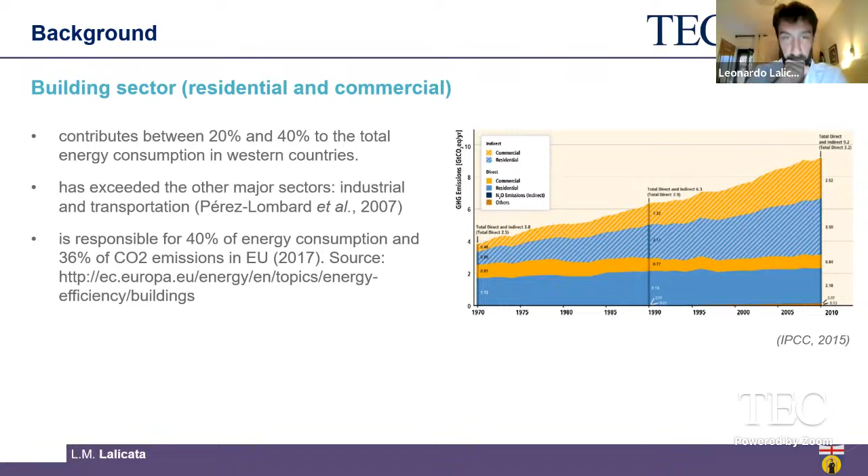With building sector, both residential and commercial, we include all, which means from the product, so the sourcing of the materials and the construction, transportation, operational use, and waste of the material and buildings in general.

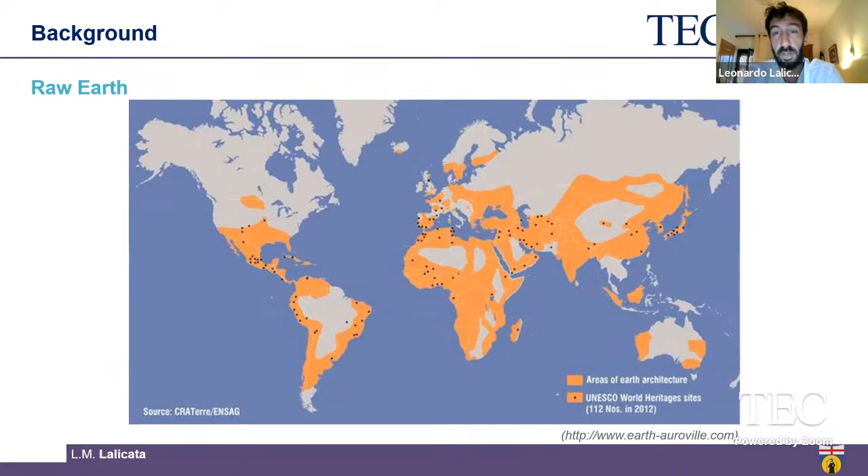Another important thing to mention is that a large number of UNESCO World Heritage Sites are made partially or in total of raw earth, earthen materials. So there is interest not only from the construction point of view, but also from the preservation of historical monuments and our heritage, to better understand how this structure works.

I've collected some nice pictures of UNESCO World Heritage Sites, such as this city in Shibam, Yemen, which is more than 2,000 years old. This is called the Manhattan of the desert, because these high-story buildings, 8 to 9 stories each, look like skyscraper profiles in a way.

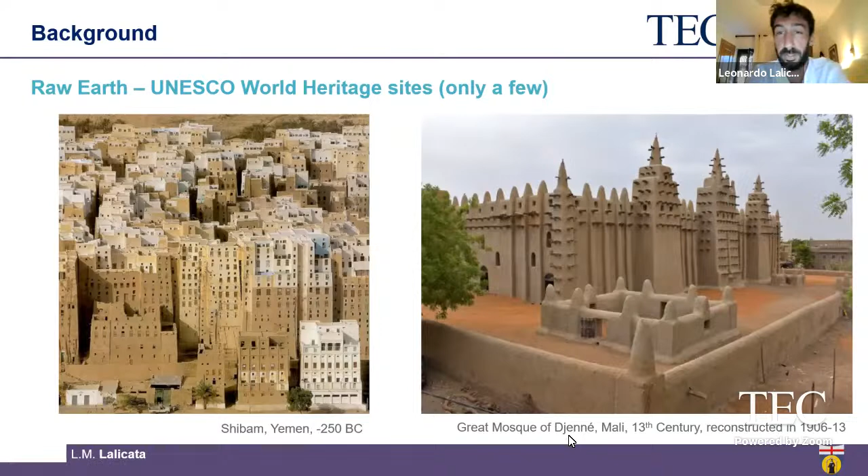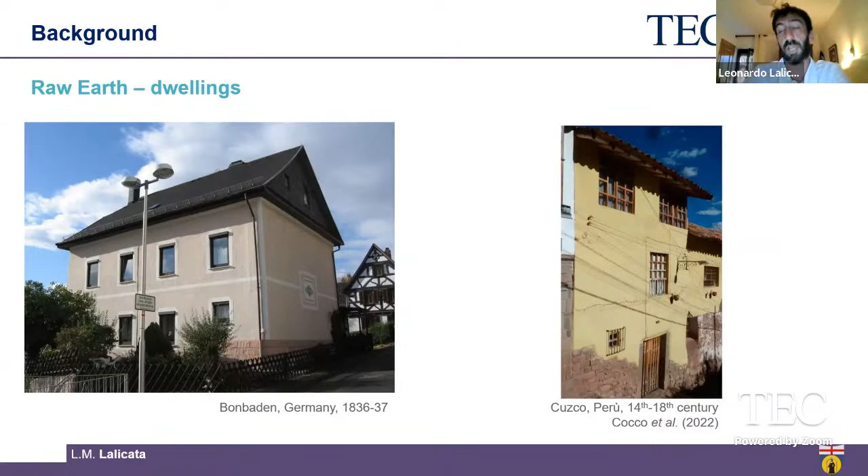There are also combinations of dwellings and UNESCO World Heritage Sites, such as the city center of Cusco in Peru, where the whole center is built on adobe walls. Buildings are made of adobe walls founded on stone foundations, and this belongs both to the Inca Empire and to the Spanish period. So they both used the same technology because it worked really well in that area.

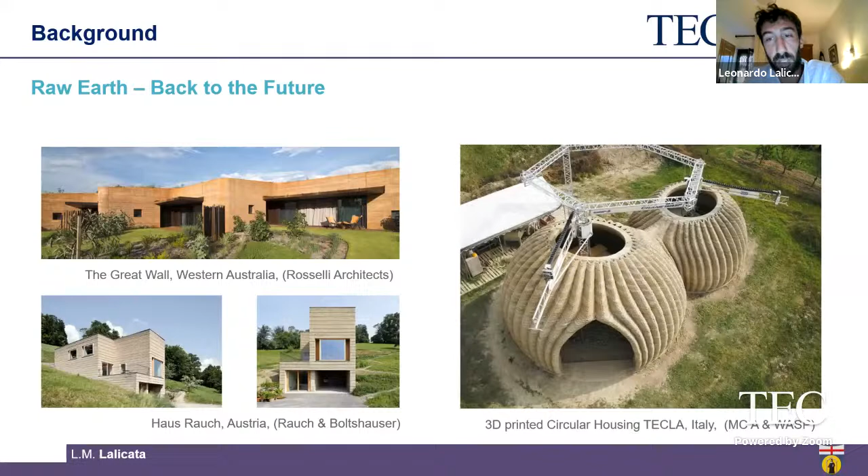This has been built in Italy, and it's notable that this 3D printed house is printed in mud bricks. So it is earth, which is 3D printed and sprayed.

So what is raw earth? Raw earth is a construction material which mixes soils and water, and is then put in place trying to undergo the least possible transformation.

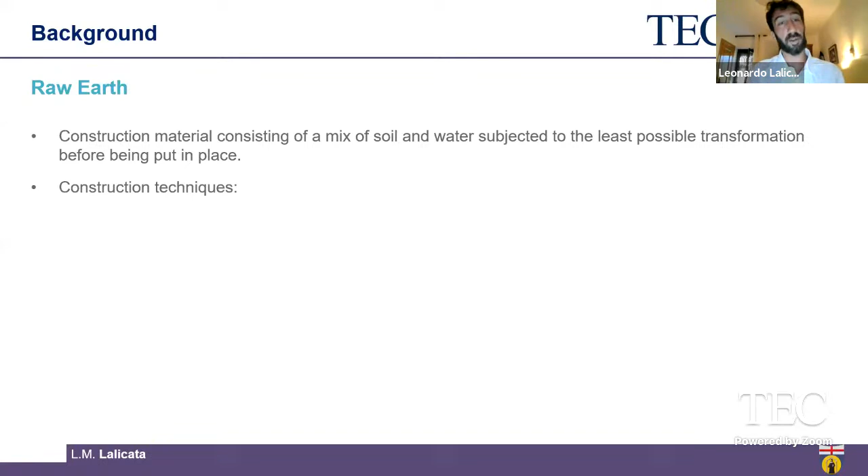During the centuries, a number of construction techniques have developed, which I've tried to summarize here. First of all, the adobe, in which you prepare your brick in formwork, and the soil is mixed with a high water content, so the soil is in a plastic state. Once the brick is dried, you can assemble your wall.

Similarly, we have the cob, in which we mix water, soil, and straw to build freestanding walls. This is particularly used in Northern Africa, for instance. Once the material dries, you can build up the second part of the building.

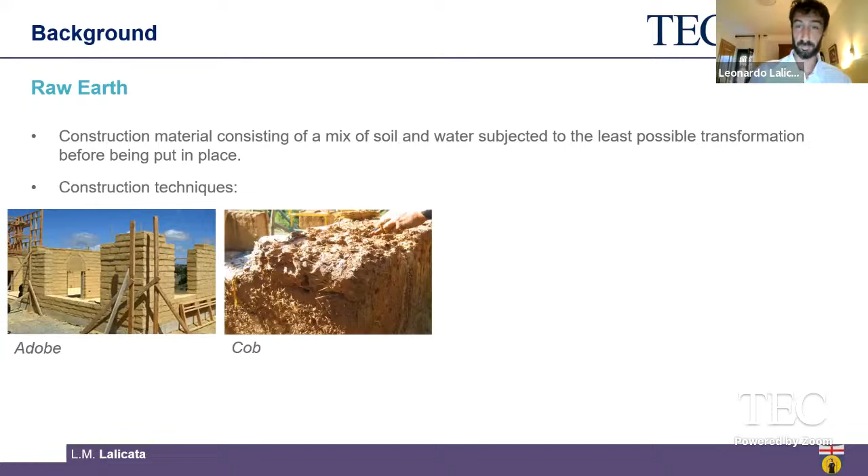We also have compressed earth bricks, in which the water content is much lower than in the other two cases, and you increase the compaction energy. You can use these bricks like Lego, compacting them into different shapes so they better fit one to each other and build a stronger wall or structure in general.

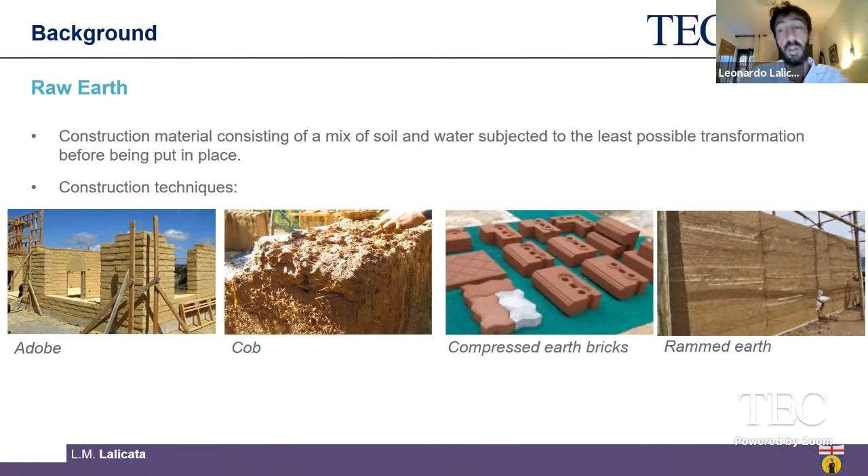And finally, there is rammed earth, a technique to build freestanding walls by compacting layers of soil at the optimum water content in formworks. When the material dries, you can remove the formworks and proceed with your construction.

At the beginning, I was talking about the building sector. By building sector, we must intend the general process: not just our buildings, but also the materials we need to construct them, plus construction, transportation, use, life cycle use, and finally end of life. It can be shown that rammed earth can help reduce carbon emissions at all stages of the life cycle.

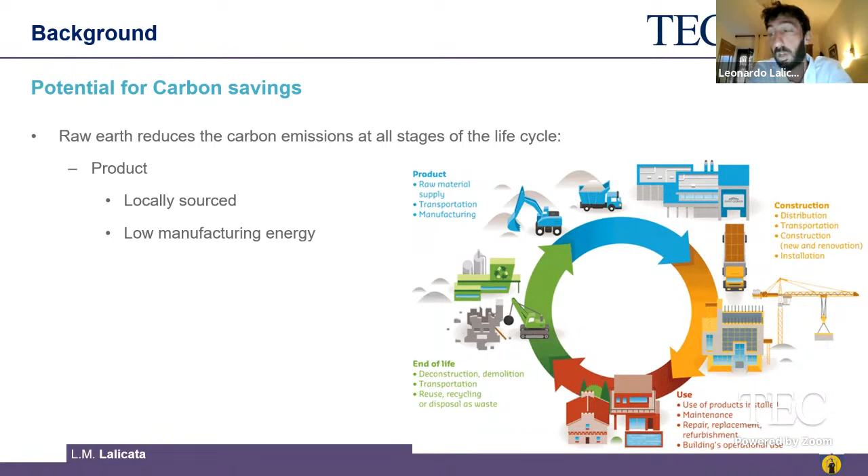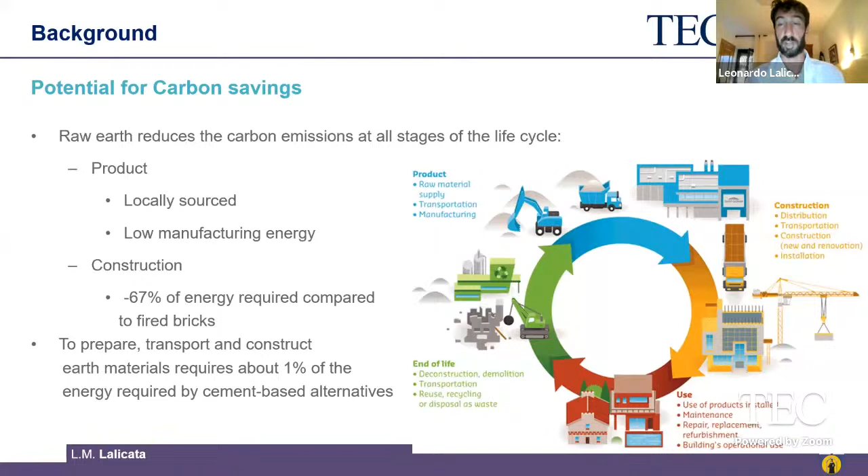In terms of product, by using earth, which can usually be locally sourced, you also require very low manufacturing energy. For example, in terms of construction, you need 67% less energy to build the same dimension brick compared to a fired brick one, so there is a significant savings in terms of energy required. And if you compare that to the energy required to build the same structure using cement-based alternatives, you need approximately 1% of the energy compared to the cement alternative, which again is a massive decrease and massive importance for carbon savings.

But first, let's go a little bit into detail on the mechanical aspects of raw earth. As I said, raw earth is made mainly of soil. The first thing to notice is that we cannot use all soils, because not all soils are suitable to be used as construction materials. There are standards and rules that tell us the particle size distribution our soil should have in order to be used.

As a general rule, you should have between 5 and 35% clay, 10 to 25% silt, and so on, approximately 40% sand, and then what is left can be gravel.

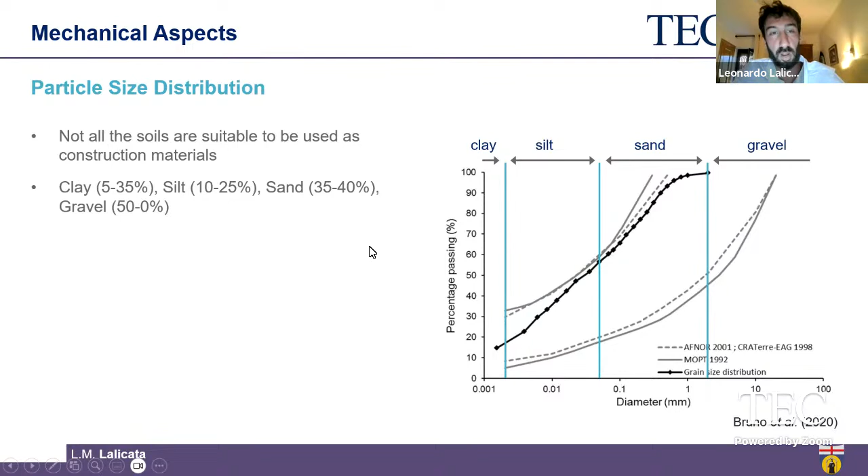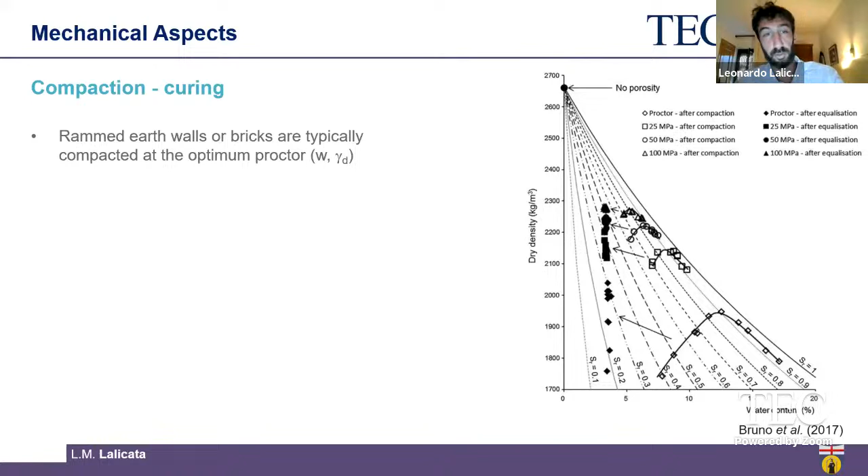After that, you need to prepare your bricks or walls, and typically you compact your samples to the optimum water content, which is the amount of water that gives you the higher density at the same compaction energy. But once you've prepared your brick or wall, you need to wait for it to cure, meaning the drying process in which the brick dries. In this case you can have some shrinking, and this shrinking can induce problems in terms of quality control, repeatability of your results, and your structure. This is very important if you want to apply that systematically.

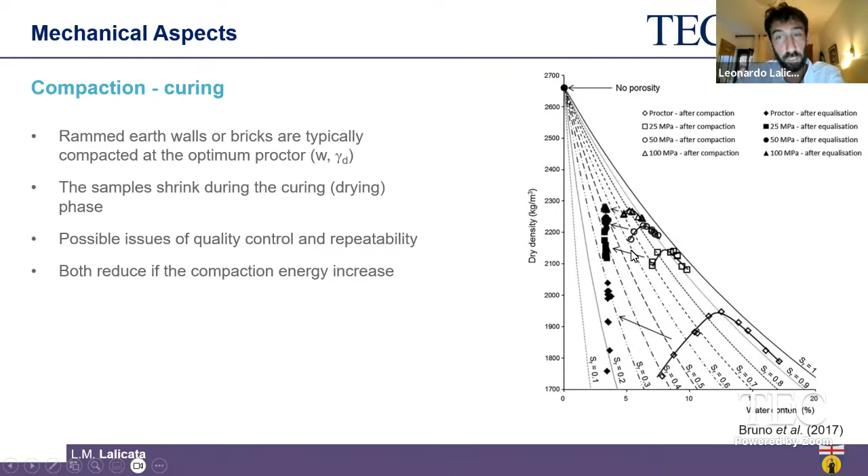One option to reduce that: you'll see your points move from this curve, and they will go to the left, because the sample will lose weight and water content, approximately 3–4%. You see there is a lot of variation in this data. One option is to increase the compaction energy. For instance, these points here show increasing compaction energy, and then the drying, the curing process, induces a much lower change in density and also in shrinking, obviously.

But another beneficial effect of increasing the density of our samples, of our bricks, is that we exponentially increase the compressive strength. As you can see, normal Proctor-compacted earthen materials have compressive strength of about 0.5 to 2.5 megapascals. But if you increase the compaction energy, so increase the dry density, you get up to 10 megapascals of compressive strength, which is more than suitable for construction purposes.

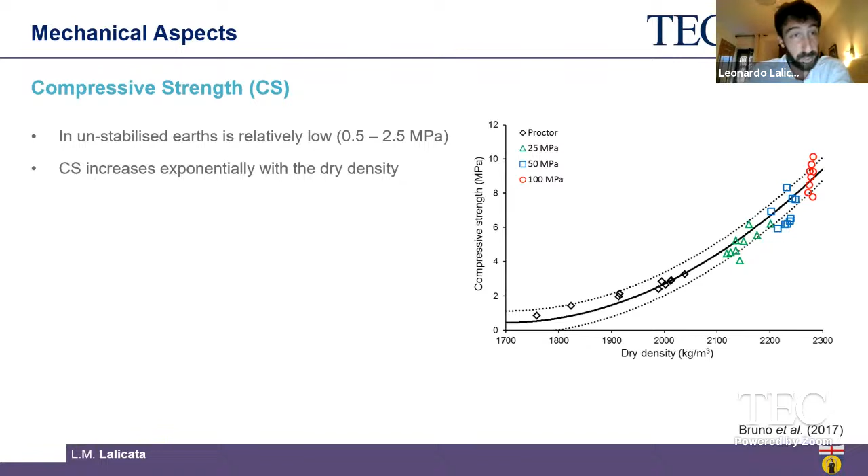An alternative to increasing the energy, because maybe you don't have the resources to do that, is to use stabilizers. There are standard stabilizers such as lime or cement, but also recently they are developing novel biopolymer stabilizers. Usually you get an increase in compressive strength with stabilizers, which is less marked for the biopolymers, but in general you get an increase in compressive strength.

Also regarding the effect of recycling this material, because earth can virtually be reused a number of times, in this study by Bruno et al., after testing the samples they crushed them and built new samples to test the influence of eventual degradation of compressive strength over different cycles.

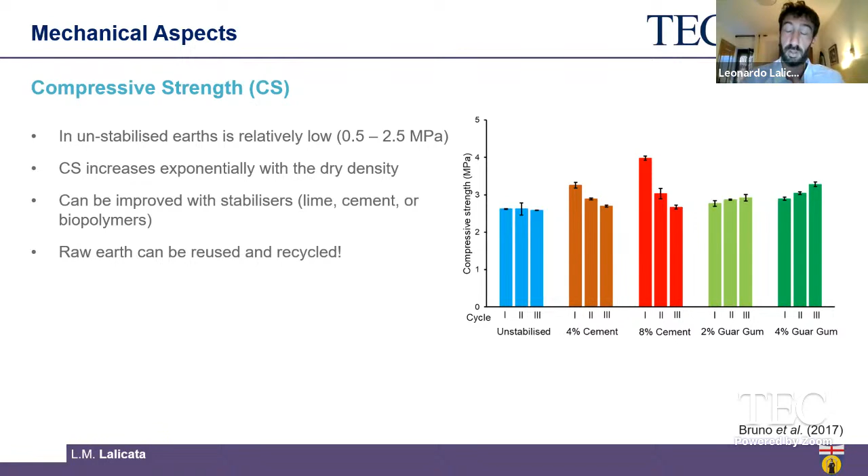What they found is that standard unstabilized earth did not reduce its strength with the number of cycles, while on the contrary, the earth stabilized with 4 or 8% cement showed a reduction in compressive strength, because you are basically breaking the bonding that the cement gives to the material. On the other hand, the biopolymers showed a slight increase in compressive strength, but this is because the curing process of the biopolymers is much slower, so something is still curing over time during these cycles. The important result overall is that you can use and recycle raw earth in both stabilized and unstabilized conditions.

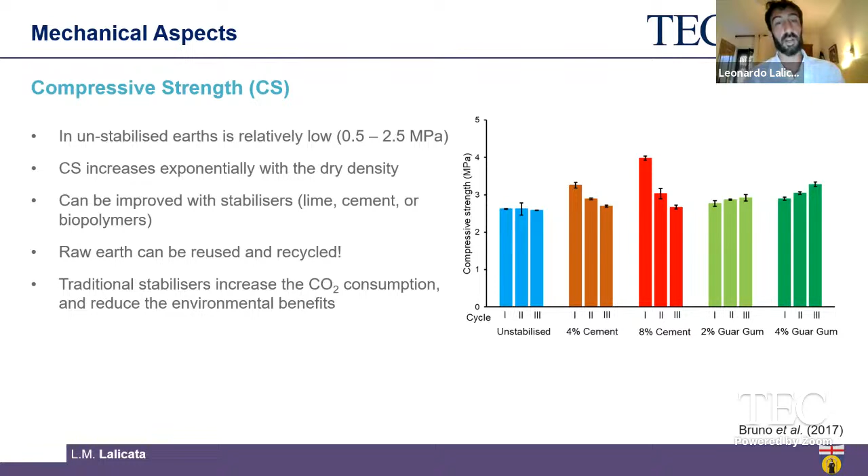The problem with the stabilizers is that they increase the carbon emission consumption, and possibly they reduce or even drop to zero the environmental benefits of using raw earth. So you need to find the equilibrium between the compressive strength and the use of stabilizers in this case.

So I hope I gave you an overview on how raw earth can tackle climate change in terms of product, construction, and also end of life, such as reuse, recycle, and disposal. What is missing in this picture is the indoor comfort, which is the operational use. What happens during the operational use of a raw earth building?

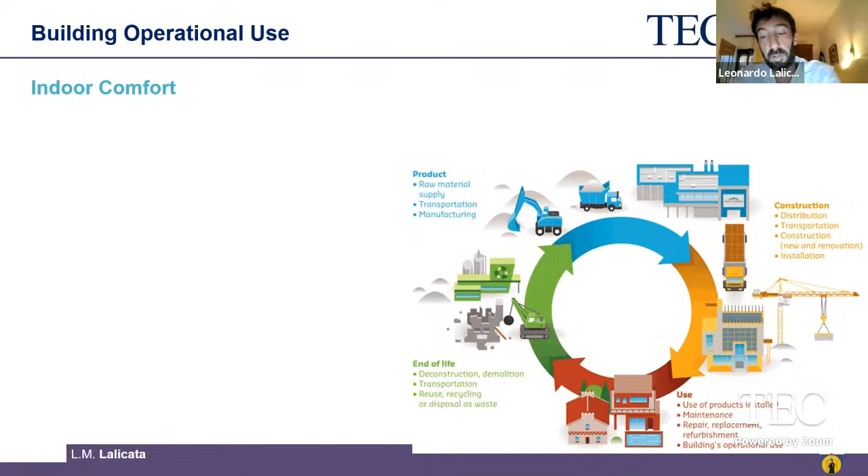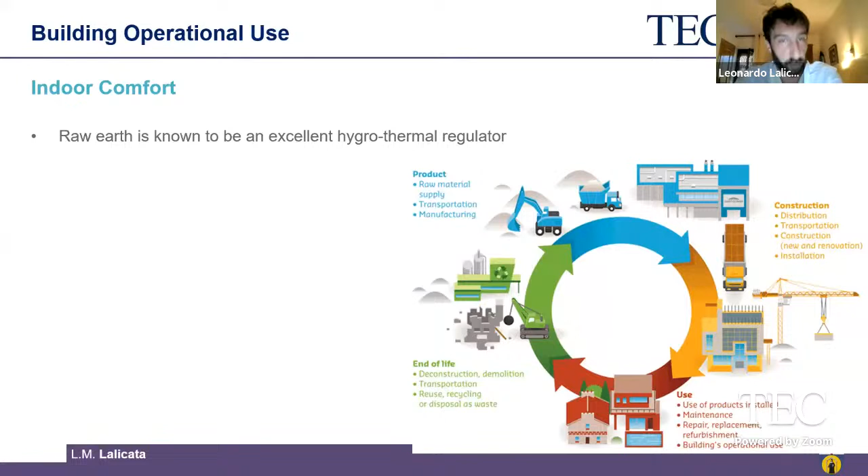Well, if you look at the literature, what you find is that raw earth is known to be an excellent hygrothermal regulator. With this hygroscopic regulator effect, the wall is capable of absorbing and releasing moisture depending on the current ambient humidity. This is possible because of the open network of nanopores present in the earth materials. As a consequence, there is also a thermal regulator effect, because the evaporation and condensation processes that occur during this absorption and release of moisture need energy. During evaporation, the soil tends to absorb heat from the atmosphere, which is then released during the condensation phases.

The problem is that you can find only qualitative assessment of the hygrothermal performance, for a very simple reason. First of all, laboratory experiments as well as field investigations are time-consuming, very expensive, and difficult to control, because it's actually a nightmare to control relative humidity, both in a climate chamber and on site. So for that reason, it's not really easy to find a proper assessment of the hygrothermal performance of earth materials.

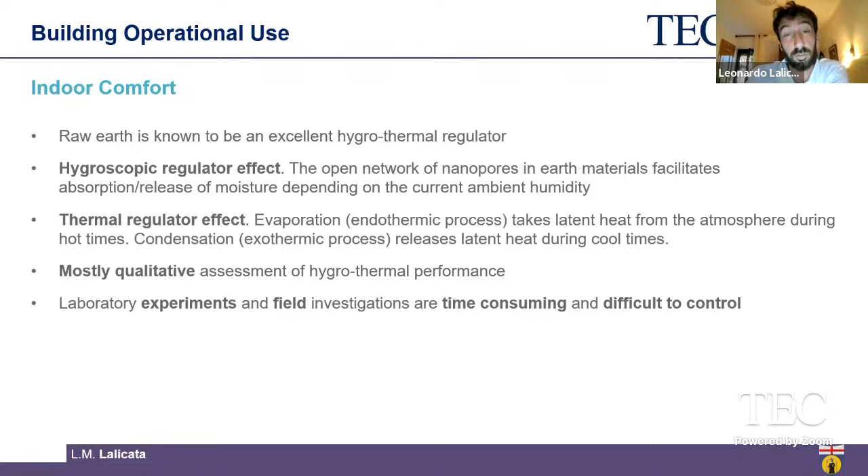One option to overcome this problem is to adopt numerical and constitutive modeling of the hygrothermal coupling. This is actually my topic, and now I'm going to show you a little bit of insight on what happens during this coupling.

First of all, with coupling, we are thinking of the complex interaction happening between the three phases in the wall: solid, liquid, and gas. Liquid and gas are water, so we have liquid water and water vapor, while the solid in our model is just a rigid structure which influences the results in terms of porosity and thermal properties of the grains. In these problems, we also need to account for the phase change between the liquid water and the water vapor that can go from one side to the other.

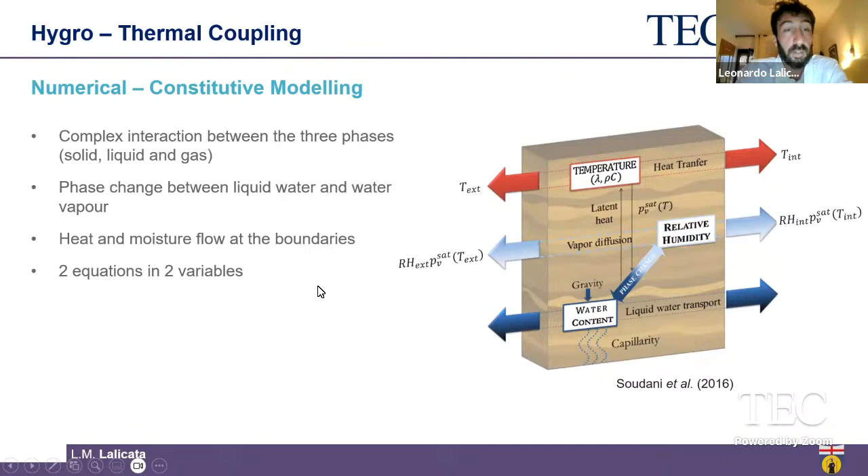We also need to account for the heat and moisture flows at the boundaries. In conclusion, we need to solve a system of two equations, one for temperature and one for water, in two variables. These two variables are generally the relative humidity for the water equation and the temperature for the energy balance.

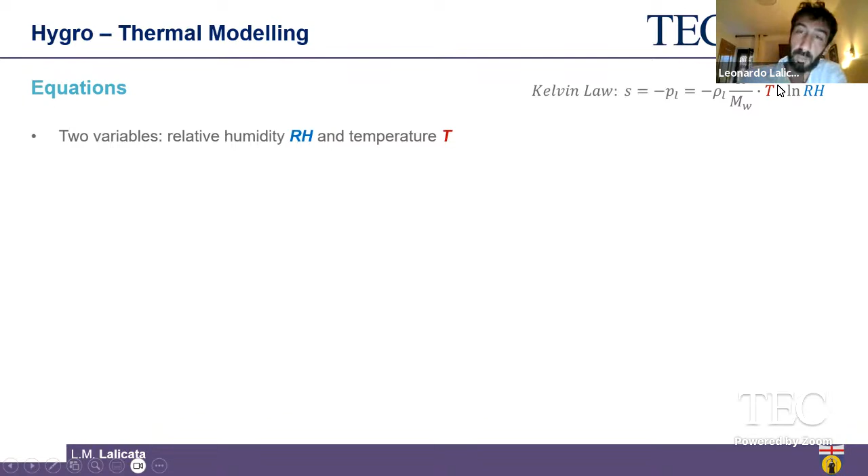To these two, we need to include another equation, the well-known Kelvin law, which links suction—a potential energy, but also the negative values of the pore pressures in the soil in our material—to temperature and relative humidity. With these two and the Kelvin law, we can write our water mass balance.

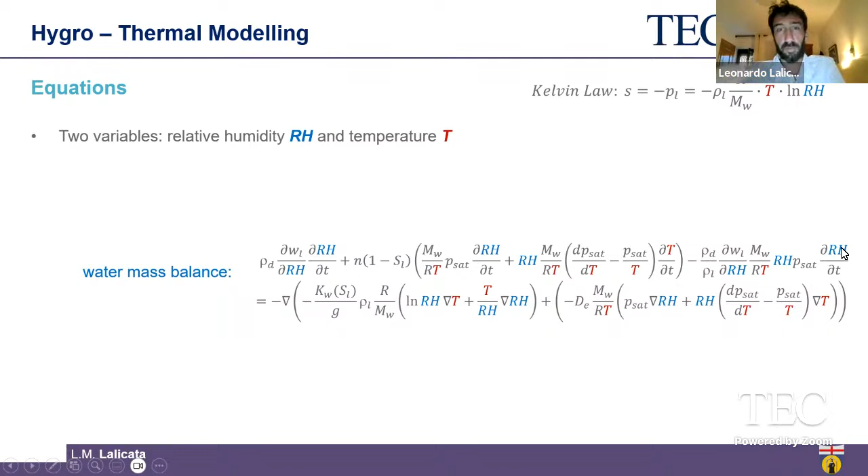That is this equation, made up of a number of terms. Basically, what it's saying is that we have a storage term for the liquid water plus another storage term for the water vapor mass, and this must be equal to the fluxes: the liquid water flow that follows the generalized Darcy law, and the water vapor flow that obeys Fick's law. So this is a diffusion process through the medium.

In terms of thermal balance, the equation has the same shape, but here the storage term is a function of the heat capacity of the materials, while the flow is given by conduction, described by Fourier's law. There is also another term, often neglected but very important in our case, which is the energy required in the phase change process, a function of the latent heat of evaporation of the water.

The first thing I tried to do when I first saw this equation was think, wow, this is very complicated. Let's try to find a way to understand what is important and what is not. This is the insight I'm going to give you now, based on the work of the last year and something, which has been published in some papers.

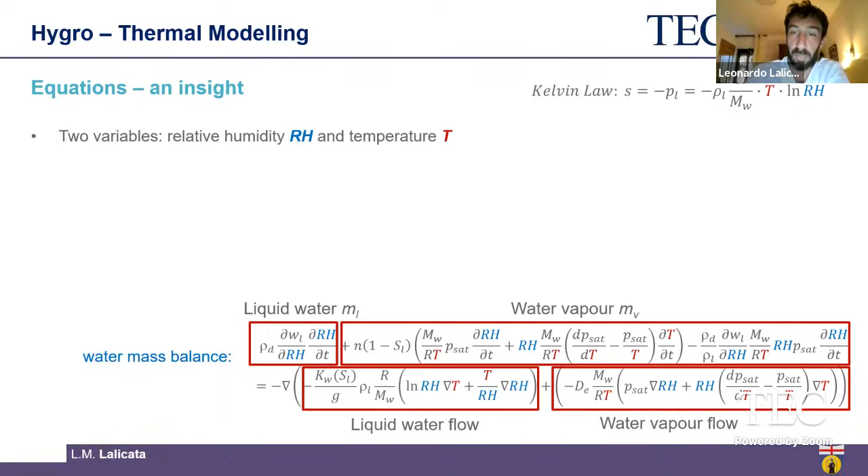First of all, I've been focusing on the water mass balance, and in particular on the importance of this term, which is the water vapor mass change compared to the change in liquid water mass. What we found is that in most applications, the change in water vapor mass is much smaller than the change in liquid water mass, meaning it's negligible. If that's true, we can cancel out this term, which really simplifies our life and our equation.

One very simple explanation for that, even though there are vapor fluxes in our soil, can be explained in terms of density. We all know the density of water is 1,000 kilograms per cubic meter, but the density of water vapor is approximately 1 kilogram per cubic meter. This means there are at least 3 orders of magnitude difference in weight between the liquid water and the vapor, which makes this assumption more than reasonable.

The other aspect I've focused on is this Kelvin law here. Suction depends on both temperature and relative humidity, but if we plot this equation, we find that suction really depends on relative humidity, changing by about 550 megapascal across the whole range. On the other side, from 0 to 100 degrees of temperature change, the changes in suction are really modest compared to those induced by relative humidity. In mathematical terms, the variation of suction due to temperature is much smaller and negligible compared to the changes due to relative humidity.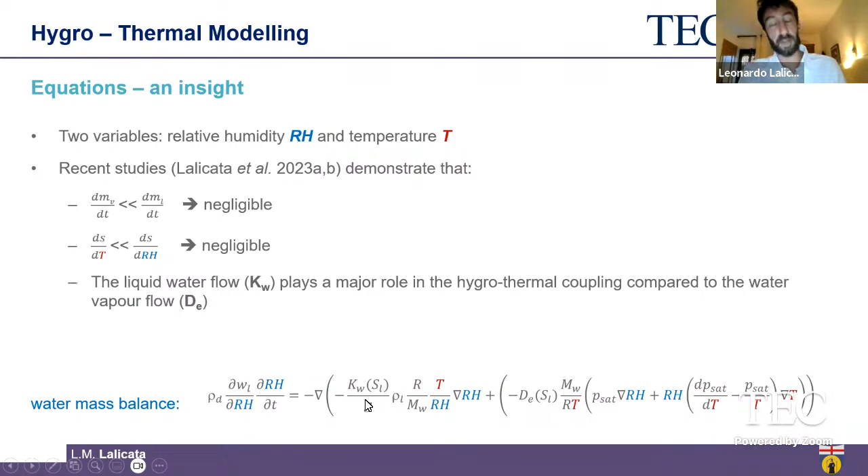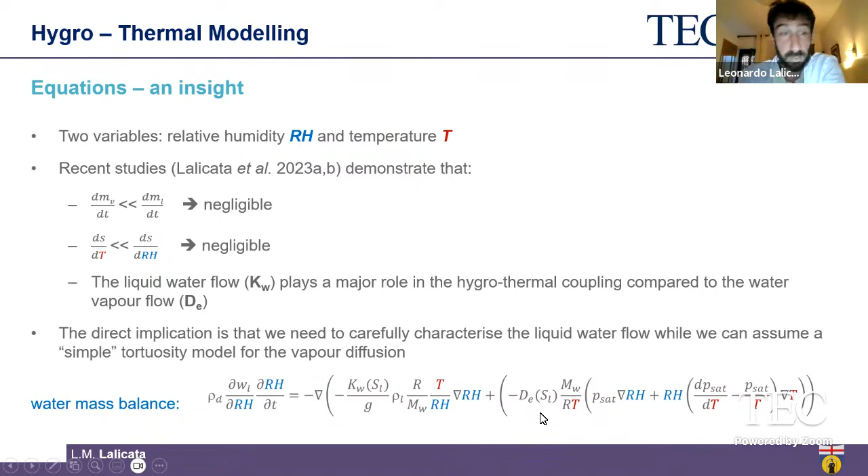The other result of our preliminary investigation is that the liquid water flow, described by this parameter Kw and depending on these parts of the equation, plays a major role in the hygrothermal coupling compared to the water vapor flow, which is the diffusivity tensor here. For us, this means we need to carefully characterize the liquid water flow, while we can assume, without any significant error, a simple tortuosity model for the vapor diffusion. By simple, I mean you can use a standard literature solution.

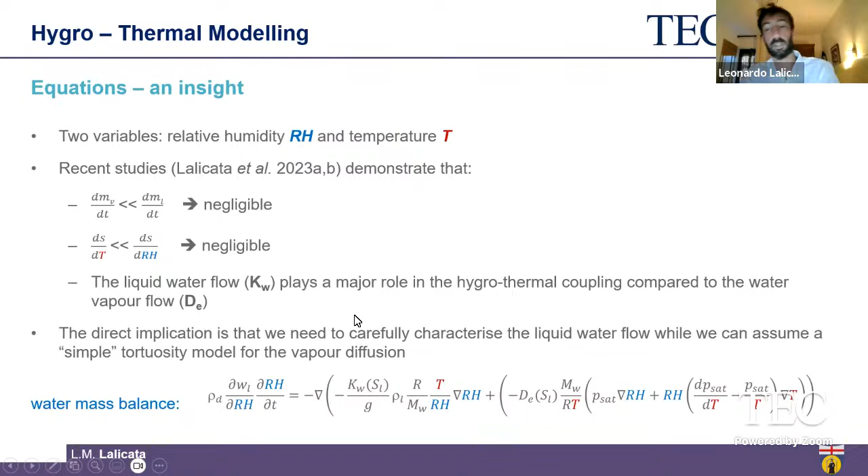Let's now understand a bit more the role of soil moisture in this type of problem. We need to characterize the storage term and also the liquid water flow. Luckily, the storage of liquid water and the liquid water flow both depend on the amount of water present in the soil, described by the degree of saturation or water content, SL or WL, but also on how it is distributed in the pore network. This is often called the water retention curve.

The other good news about this modeling is that with the same parameters, which are generally just a few free parameters, you can also model the evolution of liquid permeability with relative humidity or degree of saturation. What this equation tells us is that when the soil or material is fully saturated, the water can easily flow through the pores, because there is no air.

But as soon as we start to desaturate our models, we get a significant drop in the liquid permeability because some of the pores are obstructed by air and the water cannot flow through these pores.

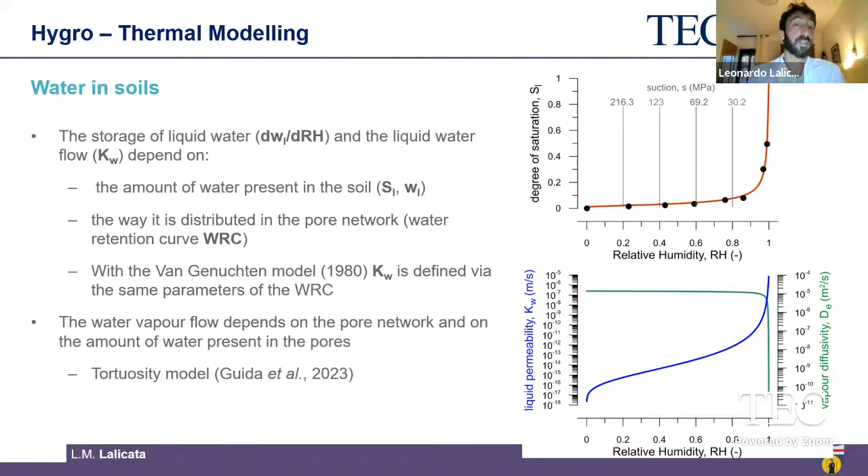And if you want to see that in the other way, what happened to the water vapor, well, it's the same thing. When the degree of saturation is very low, that means when the relative humidity is low, the vapor can easily flow through the medium, through the pore networks. But as the soil approaches saturation, you get a drop in the vapor diffusion that really drops to zero, because when the soil is fully saturated, there is no air, so the vapor cannot pass through the medium.

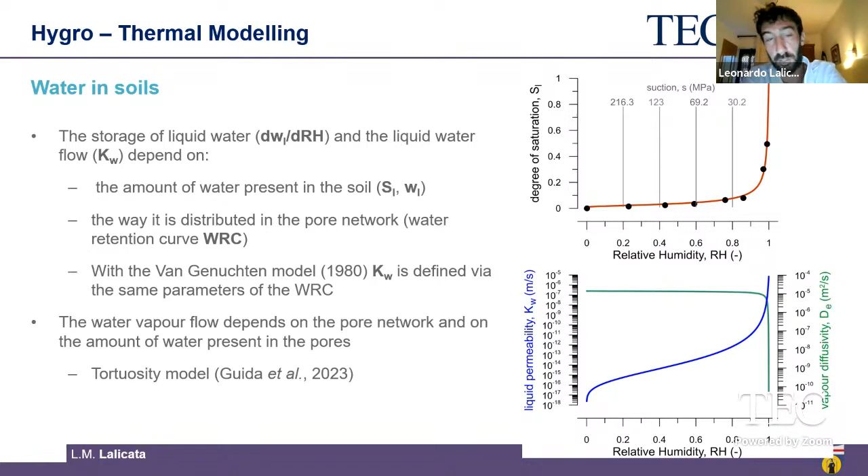And this is what is described by the simple tortuosity model, which has been used also to study the desiccation of soils, such as the study of Guida et al. in 2023.

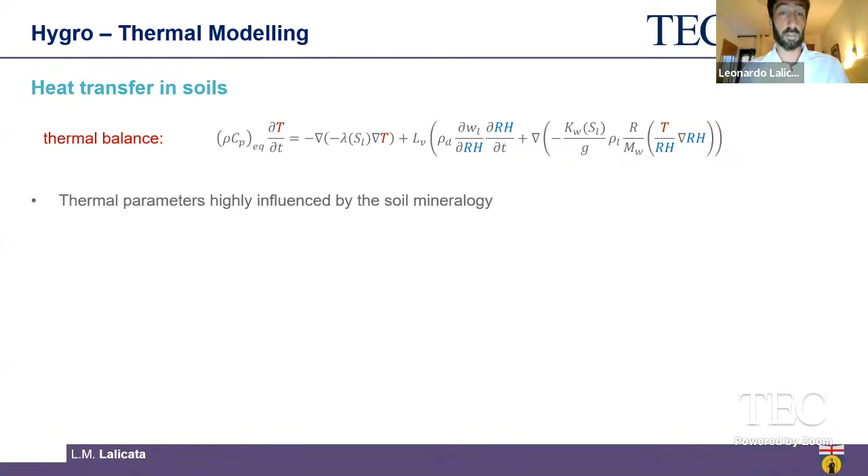Then we need to define the thermal parameters, and thermal parameters in general are highly influenced by the soil mineralogy, so you need a specific test to evaluate them. But for instance, the equivalent heat capacity of our soil, which our domain includes the soil, the water, and the air, is nothing but a volume average of the heat capacity of the single species, such as solid, water, and gas in our domain, which means that the only unknown is the heat capacity of the solid particles, this parameter CPS here.

On the contrary, for the thermal conductivity, lambda, which again is a function of the amount of water we have in our model, what is observed from experimental data.

These are data collected by Losini et al. You see that the thermal conductivity increases with the water content, and this again is reasonable because the water is a very good conductor. So the more water we have, the higher is the thermal conductivity, the global thermal conductivity of our material.

And in the other case, you see that the dry thermal conductivity, which is the thermal conductivity of the soil particle, increases by increasing the density, because the conduction works better if the soil particles are in better contact. And this is what you get when you have a high density in your samples.

So this is a linear trend. To be honest, we just need to know the dry density, the thermal conductivity of the dry soils, and this slope that you can see is pretty much constant if we take out from the group these purple points in here.

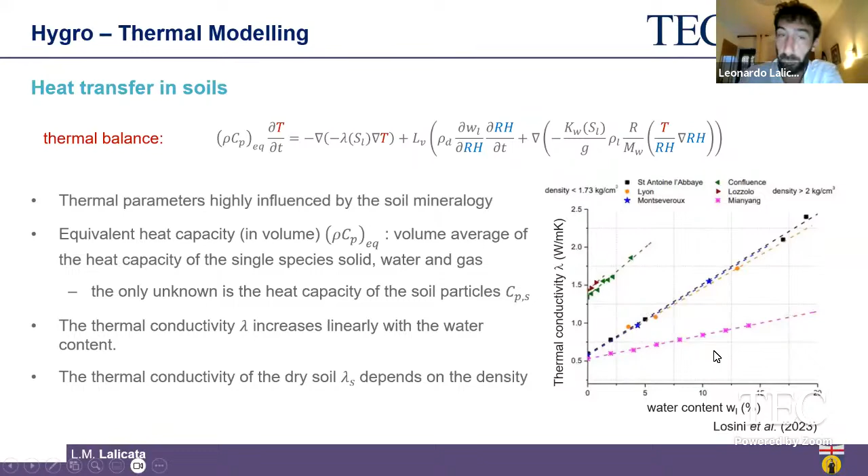And for the solid particles, we need to know the porosity of the materials and the density of the soil particles, which is usually pretty much constant, around 2,700 kilograms per cubic meter, which means that we have two, or we can also say one parameter for the solid particles.

Then we have four parameters for the hydraulic part, and three of them are the water retention parameters, for instance, that are the same ones that describe the evolution of the liquid permeability with the degree of saturation. In addition to that, we need to compute and evaluate the saturated permeability, K-SAT, and this can be done with a very standard and traditional oedometric test in a geotechnical lab.

And finally, we need to quantify the thermal properties, for which we need three parameters, as I said. So we need the specific heat of the solid particles, the thermal conductivity of the dry soils, and the thermal conductivity parameter, which is the slope of the trend that you have seen before. So with a number of 7, 8, or maybe 9 parameters, we can solve our problem.

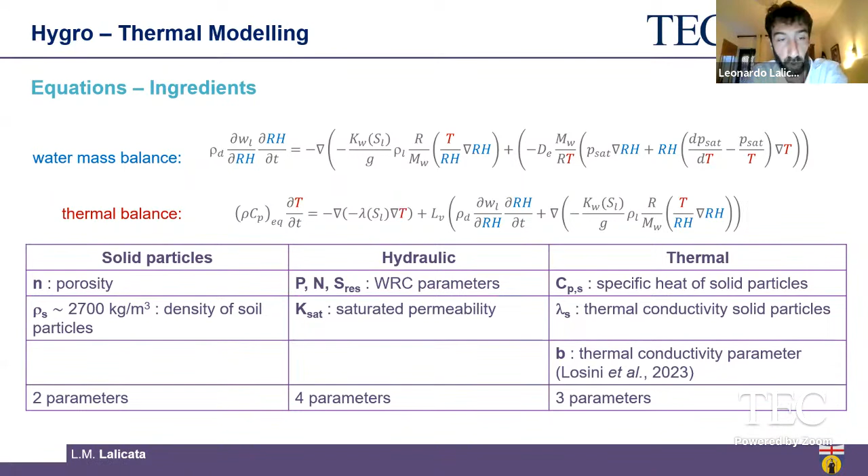Now I'm going to show you an example of this hygrothermal coupling. And to do that, we started with a very simple model of an infinite wall.

Under this condition, assuming no influence of gravity and no capillary rise from the foundations, the problem simplifies and reduces to a simple one-dimensional model. We are also assuming that the boundary condition, defined in terms of thermal flow and water vapor flow at the boundaries, is the same both on the left and on the right of our wall.

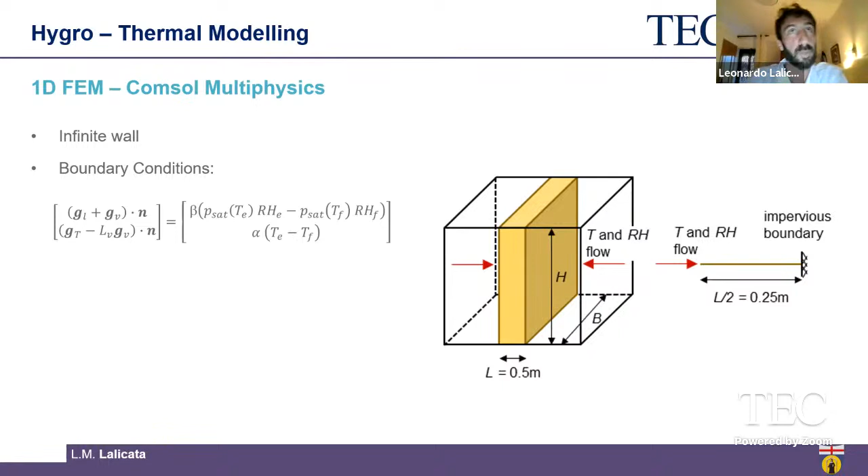So if we do that, we can study just half of our model. On one side we apply the boundary condition, and the axis of symmetry of our model is an impervious boundary, obviously. We played a bit with the perturbations: we applied a hydraulic perturbation in which we kept the temperature constant and changed the relative humidity on this boundary. And obviously we did the other way around too, keeping the relative humidity constant and imposing a daily variation of temperature at the other boundary.

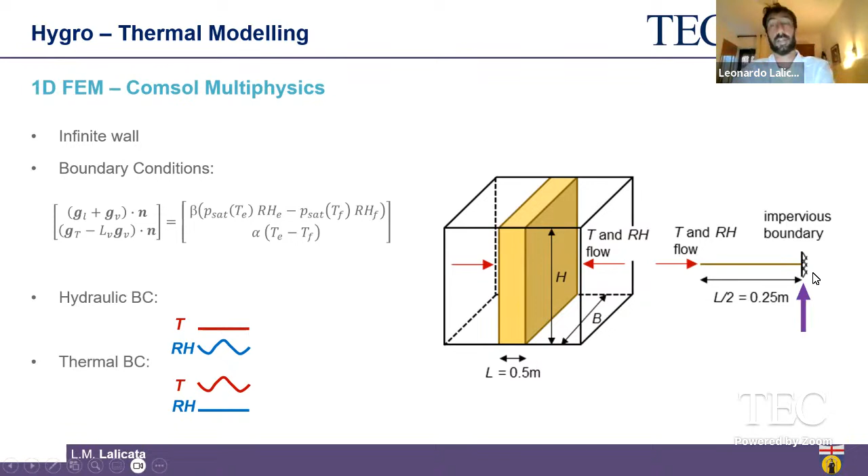The results I'm going to show you will all refer to the center of the model, so the impervious boundary here. Let's now try to have a look at these results.

These are the results from the hydraulic boundary condition, in which temperature has been kept constant and relative humidity changes. What happens is that at this point, after a while, the soil starts to dry, so there is a reduction in relative humidity. This is because the imposed perturbation is globally a drying process, and this process also depends on the initial values of temperature in our model. But what is interesting here is the coupling term.

So what happens to the temperature when we impose just a change in relative humidity? In the first 100 hours of this simulation, we observe a reduction in temperature at this point of the model, which is also a function of the starting point of the initial temperature values, meaning that the higher the temperature, the higher is the coupling we have in our models.

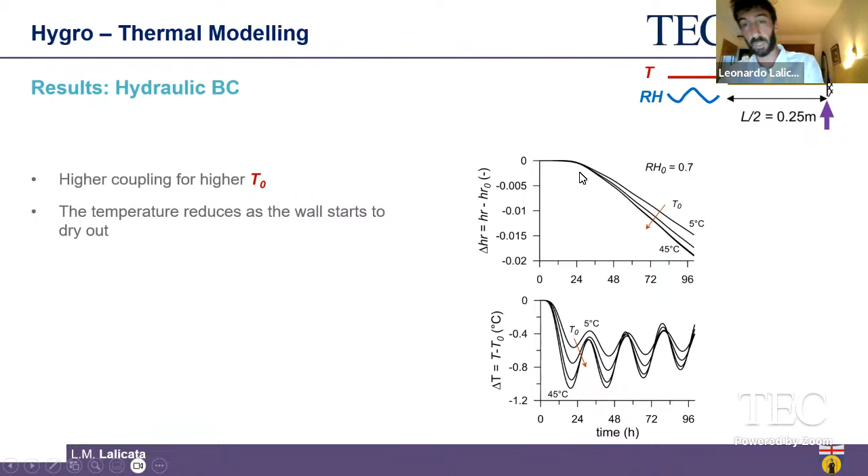If we look at the other problem, the thermal boundary condition, we observe two things. First, the coupling is significantly smaller: the temperature reduces by about 10 degrees at some point, and this change in temperature of 10 degrees corresponds to a very little change in relative humidity of about 0.5%, which from an engineering perspective is practically zero.

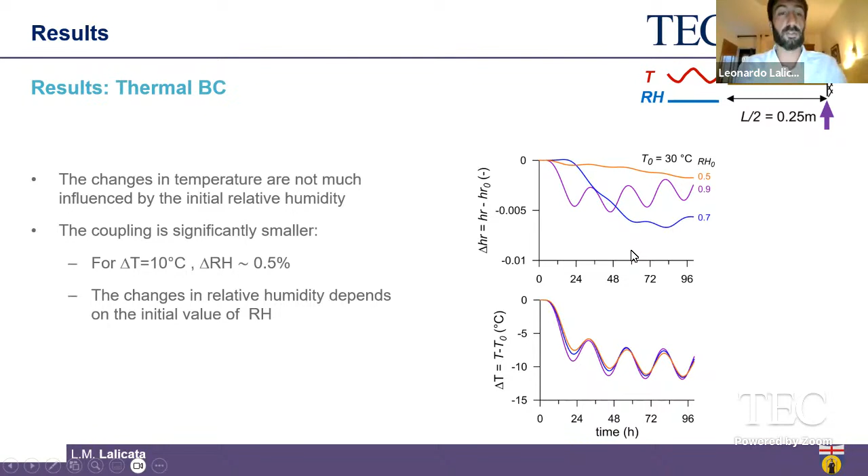What's important to note is that this direct problem is not really influenced by the initial values of relative humidity, but the coupling, even if little, is still influenced by the amount of relative humidity we have in our samples.

On the concluding remarks, I hope in this brief presentation I gave you an idea that earthen materials are a multidisciplinary and multi-scale field of emerging interest, involving geotechnical engineering, structural engineering, but also material engineering and physical engineering for indoor comfort. On top of that, there is also a very good interaction with chemistry for the stabilizer, but also with the architectural side for the preservation of our historical and cultural heritage in earthen structures.

In our opinion, the research should now try to find novel stabilization methods that provide low environmental impact while still increasing performance, both under low mechanical loading and under hygrothermal loading. These numerical models, which at the moment are consistent and comprehensive in describing the main aspects of hygrothermal coupling, should now be used to assess the quality of indoor air in earthen structures.

This is not really geotechnical, it's something other engineers should do, but it's a suggestion I think is very important: we should try to assess the life cycle of earthen structures, considering all aspects from the sourcing of the product to the end of life, because this could also help inform the choice of stabilization method we may or may not want to use.

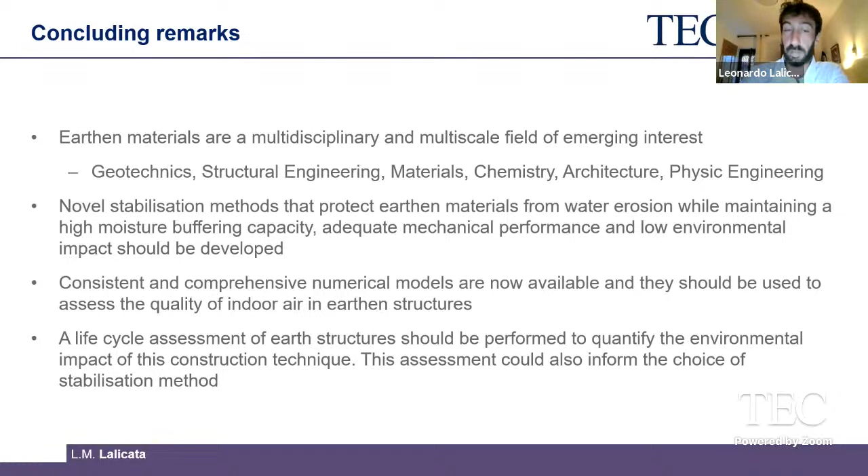And finally, obviously, we need to explore new construction techniques with no fear of exploiting digital manufacturing or also some artificial intelligence in this case.

Well, this was pretty much all. I just want to acknowledge the other members of the research group at the University of Genova. The person who leads this research group is Professor Domenico Gallipoli, who has been working on raw earth construction and unsaturated soils for many years. Also Dr. Agostino Walter Bruno, assistant professor at the University of Genova, who has worked on the structural performance of earthen structures from a geotechnical perspective. If you want to expand your knowledge or work on this or other geotechnical topics, please feel free to contact us and drop us an email, and we can arrange a discussion. Thank you very much, I have concluded. Gracias a todos.